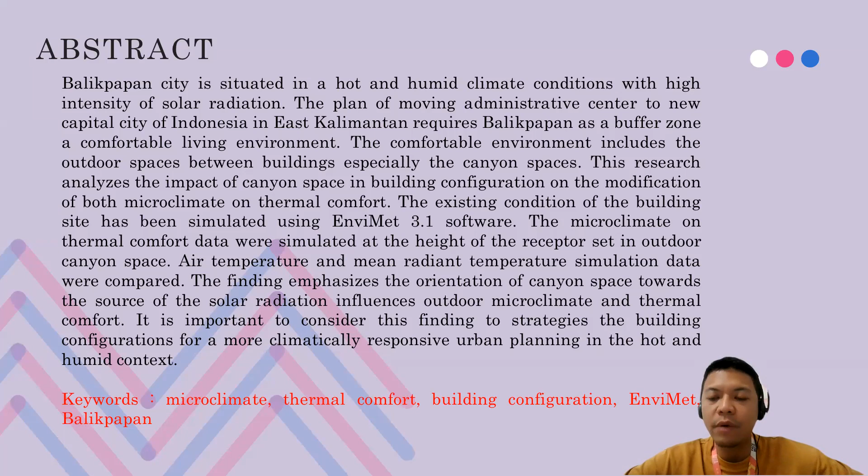This paper is based on simulation using EnviMet software to figure out the microclimate and thermal comfort condition in two different building canyon settings. Balikpapan City is located close to the equator, so it is important to consider these findings to strategize the building configurations for a more climatically responsive urban planning in the hot and humid context.

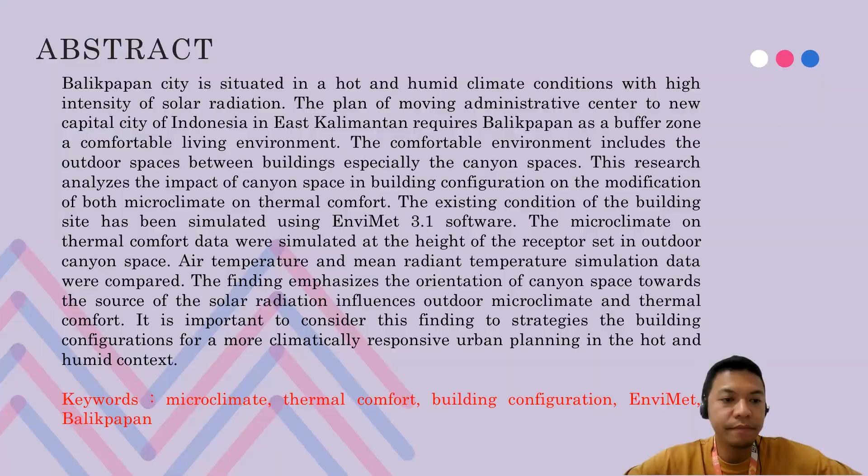Microclimate is a climatic condition in a certain area with an altitude close to the ground surface, which consists of several elements including temperature, wind speed, humidity, and others that influence thermal comfort for the surrounding populations. And the EnviMet 3.1 software is software that is used to analyze the interaction between a development plan and the microclimate on a small scale in an area in order to produce recommendations for the thermal comfort generated in the development plan.

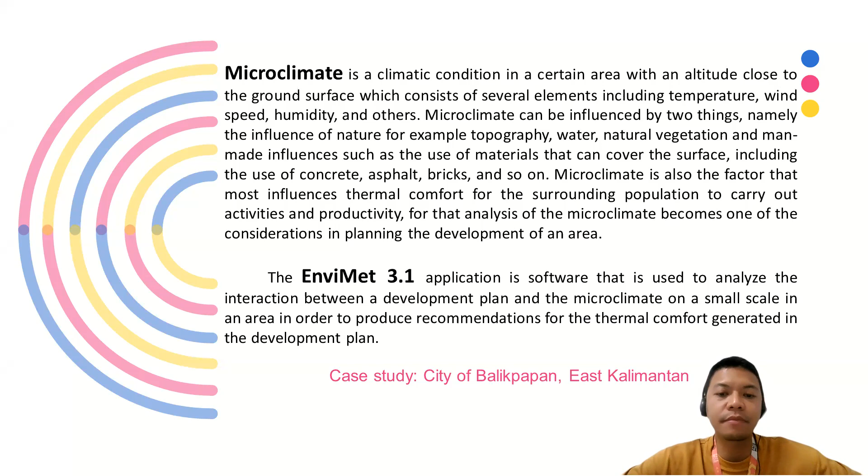So this table shows the setting and configurations used in this research, as we had conducted 5 sequences of process in this study. The first is determining the building site configuration combined with the microclimate configuration set on September 18, 2021 from 12 a.m. to 12 a.m. the next day in Balikpapan City. Second, modeling the building site configuration.

The third, conduct simulation using the data on building site configuration and microclimate that have been obtained, with the height of the receptor at the average height of the Indonesian population, and the location of the receptor in the center of the building site. The simulation was conducted by comparing the condition of the microclimate in the direction of the canyon north-south and east-west, which were set according to the source of the solar radiation.

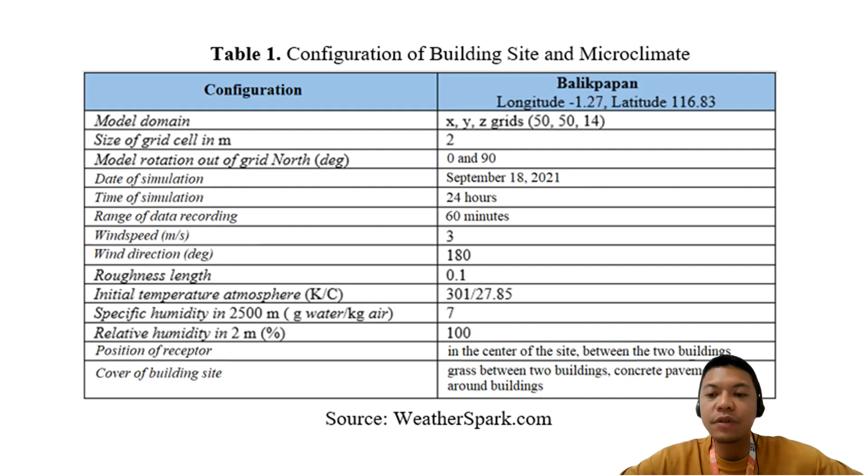Fourth, comparing thermal comfort is also done on the orientation of the north-south and east-west canyon. Fifth, simulate the thermal comfort with Leonardo image modeling. The entire simulation was conducted in the study using EnviMet 3.1 software.

So as we can all see in the 3 pictures here, these are results of observation on the comparison of microclimate conditions in both canyon orientations. Wind speed at the receptor point from 12 a.m. to 12 a.m. the next day in the north-south canyon orientation is higher, 1.6 meter per second to 1.8 meter per second, than the east-west canyon orientation, 0.1 meter per second to 0.3 meter per second.

This is influenced by wind direction conditions originating from the south, so that in the north-south opening, the wind will blow directly to the receptor point, unlike in the east-west opening, which was blocked by the building. Relative humidity, or QREL, from 12 a.m. to 12 a.m. during 24 hours in the north-south canyon orientation, 74% to 88%, tends to be higher than the east-west orientation, which is 70% to 85%, although not significantly.

The temperature at both canyon orientations was not significantly different. However, the last picture on the bottom illustrates that the temperature in the north-south canyon orientation receptor point from 12 a.m. to 7 a.m. and from 3 p.m. to 12 a.m. is lower than that of the east-west canyon orientation, while during the day, from 9 a.m. to 2 p.m., the north-south canyon orientation has a higher temperature than the east-west canyon orientation.

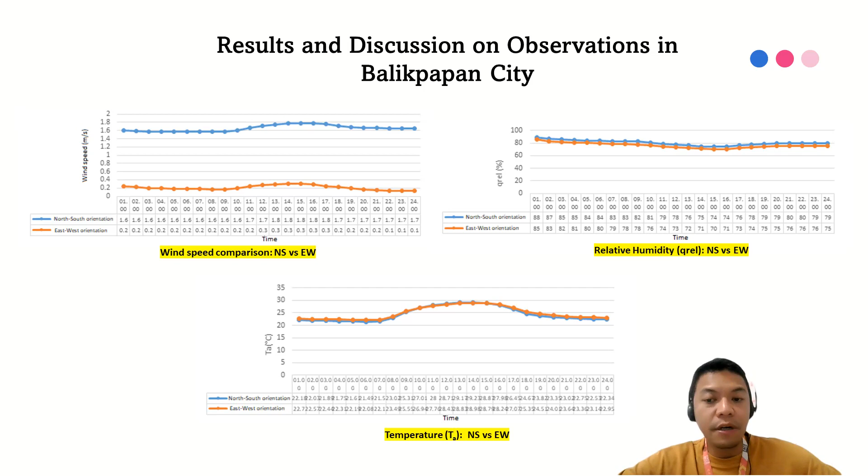The results show that the influence of building orientation is not too significant in influencing the microclimate, but it also needs to be followed by other building design configurations, such as setting the height of the building and setting the height-width ratio of openings. Based on the temperature comparison between the north-south and east-west canyon orientations, which is not too significant, it shows that the building height of 10 meters is still insufficient to create a shading area.

And observing the temperature and thermal comfort temperature in both orientations of the canyon, the following results were obtained. Thermal comfort fluctuates more than temperature. The comparison between temperature and thermal comfort tends to be directly proportional at 1 a.m. to 7 a.m. and at 6 p.m. to 12 a.m. The drastic fluctuation of thermal comfort occurs in the range from 9 a.m. to 5 p.m. and does not occur with the temperature.

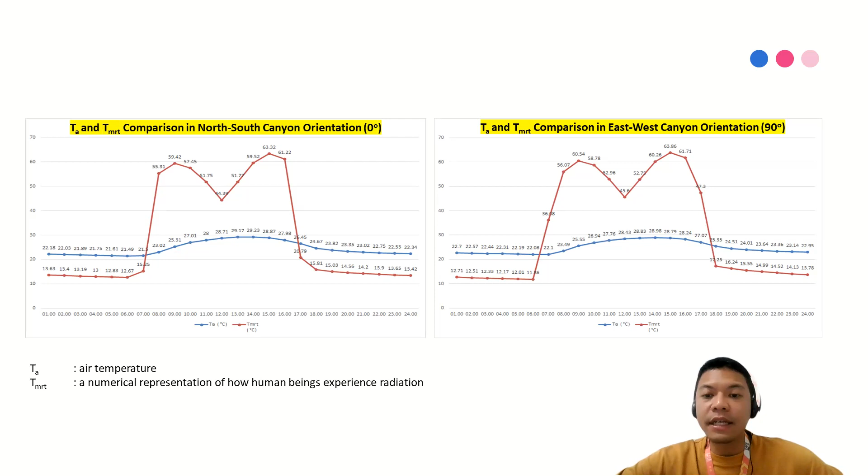An inverse comparison between temperature and thermal comfort occurs from 9 a.m. to 12 p.m. The result shows the change in thermal comfort is not solely influenced by the temperature, but there are other microclimate factors that influence it. To explain this, the data in the upcoming table can be used as a reference.

So the north-south canyon orientation has better thermal comfort than the east-west canyon orientation. This is partly due to the higher wind speed conditions in the north-south canyon orientation compared to the east-west canyon orientation. So the X factor is the wind speed.

So these figures show thermal comfort for the north-south canyon direction under overall site conditions taken at 10 a.m. and at 2 p.m. respectively. In general, the north-south canyon direction shows a lower thermal comfort than the east-west. The highest thermal comfort occurs at 2 p.m. in the east-west canyon direction, represented in red in the central area of the site between the two buildings.

Meanwhile, the lowest thermal comfort occurs at 10 a.m. in the north-south canyon direction, represented in orange, with a hint of red and slight orange color in the middle area of the site between the two buildings. For the concrete pavement area, colored in fuchsia, around the buildings, the thermal comfort is relatively at the same level in all scenarios, which is the area of the site with the highest thermal comfort compared to other areas of the site.

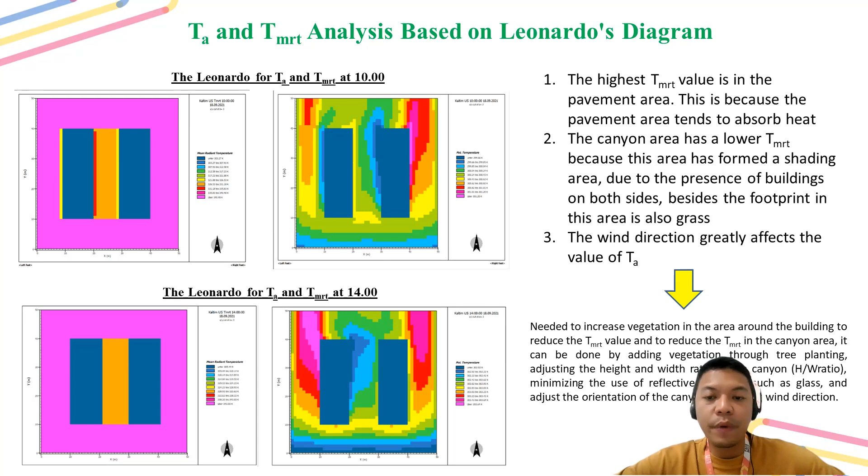So from the research that we have conducted, we conclude that there is a mutually influencing relationship between the canyon orientation, microclimate conditions, and thermal comfort. The increase in the temperature is not always followed by an increase in the thermal comfort, but other microclimate factors influence it: the wind speed and relative humidity, geographical location, and the position of the sun.

North-south canyon orientation is more recommended to increase the thermal comfort in Balikpapan City. However, the selection of canyon orientation also needs to be followed by the physical configuration of the building. The addition of vegetation needs to be done around the building area because vegetation has the function of filtering radiant heat and increasing thermal comfort in the area.

And we recommend increasing the number of water bodies and vegetation in the form of providing green open space, adjusting the height-width ratio of the openings, regulating the design or architecture of the buildings, and also adjusting the orientation of the canyon. So that's pretty much what we can conclude and recommend from our research.